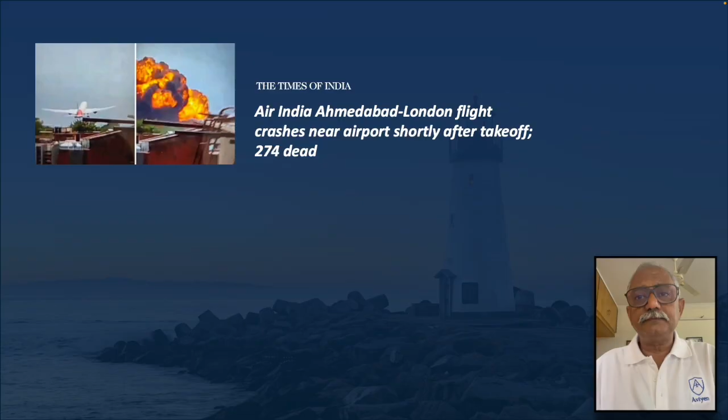Safety management system need for reforms. In the recent past, India has experienced a few tragic air accidents. Everyone's asking, what went wrong? Was it a mechanical failure, human error, or something else? But this video isn't about speculation. Until the black boxes are decoded, no one can say for sure what happened. What is clear, though, is that we have a system that's meant to prevent tragedies like this, and that system has some serious cracks.

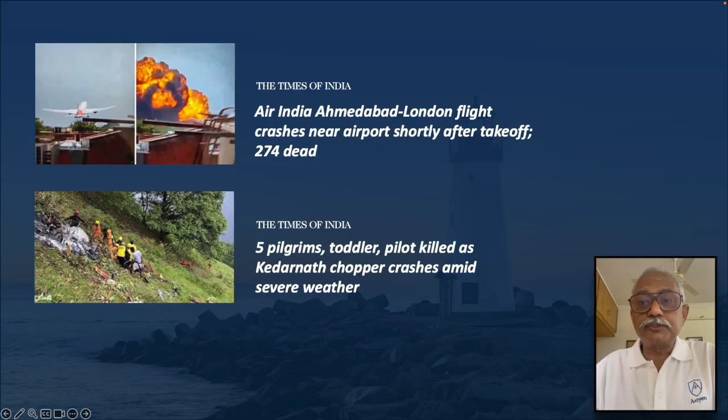This video is intended to raise awareness among stakeholders about the current state of safety management in Indian aviation. Don't be surprised, majority of the safety management systems across the globe are no different. As a disclaimer, this video isn't about blaming anyone, including Air India or Boeing. It's about learning from the systemic gaps and pushing for stronger aviation safety management in India.

Let's start by breaking down a few key terms from the world of aviation safety. There's a big difference between a hazard, an incident, and an accident. Similarly, risk assessment and root cause analysis are two very different things. A hazard is a potential risk, something that could happen. On the other hand, an incident or accident is something that's already happened.

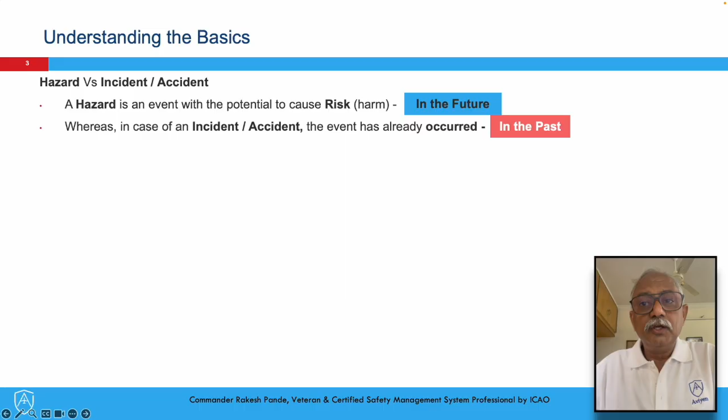So what do we do with them? For hazards, we carry out risk assessments to evaluate potential threats and put preventive controls in place. For incidents and accidents, we are supposed to do root cause analysis to figure out why something happened and how to stop it from happening again.

Risk assessment is more subjective. It's based on expectations, assumptions, and can differ from person to person. Root cause analysis, on the other hand, tends to be factual and objective because the event already occurred and past data exists to make informed judgments.

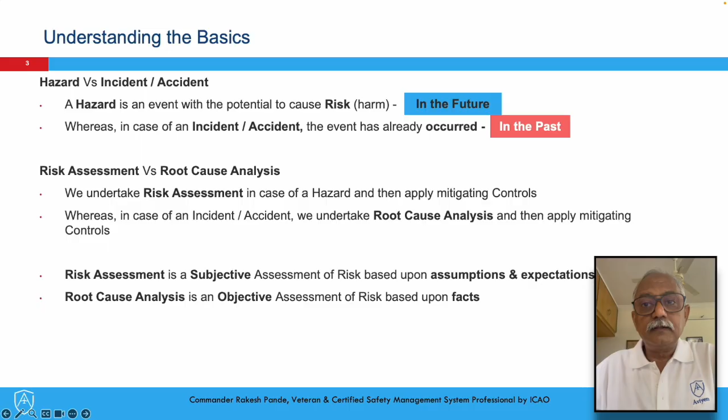Now let's talk about where things go wrong, starting with DGCA policy. The DGCA's 29 September 2020 policy requires aviation organizations to maintain something called a hazard register. But the way this hazard register is defined is quite messy. It borrows from three different sources: ICAO, the Defense Standard, and the European Union Aviation Safety Agency, and lumps hazards, incidents, and accidents all into one list.

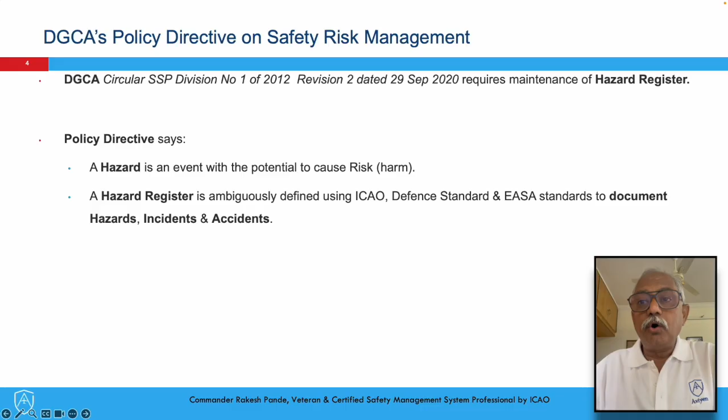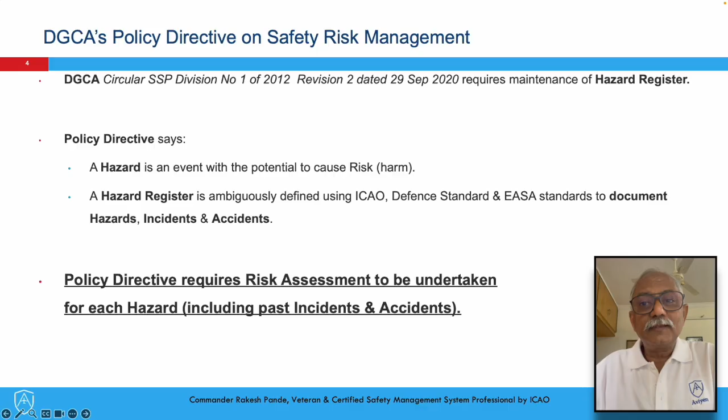So far, so good. But here's the kicker. The DGCA requires a risk assessment for each item in that list, even the ones that have already happened, like incidents and accidents, for which root cause analysis should rightly be done. And that's where the core flaw lies. The system logs incidents and accidents, but doesn't require any root cause analysis.

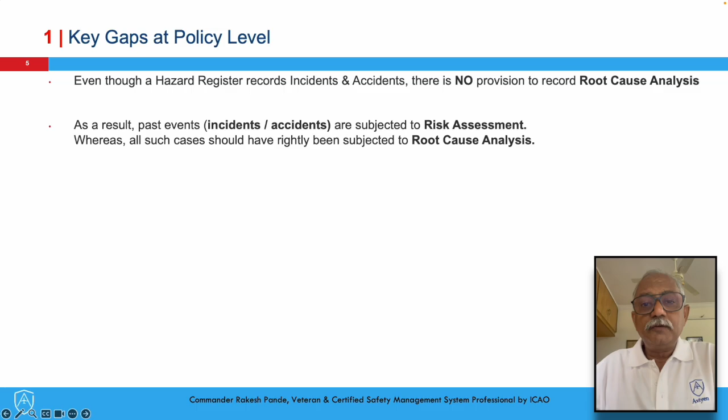Instead, even past events are subjected to subjective risk assessments. We are using guesswork to fix things that already happened, when we should be using actual data to get to the bottom of it. Because of this, real underlying causes remain unresolved, and the same mistakes are likely to repeat. Even DGCA's own records of past incidents and accidents hardly identify and document specific root causes or any long-term mitigating measures.

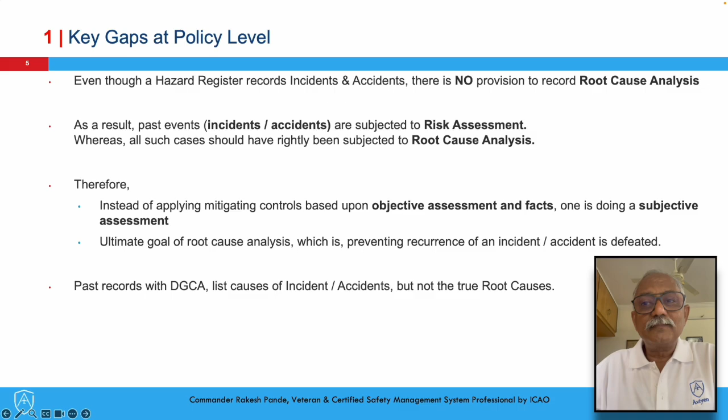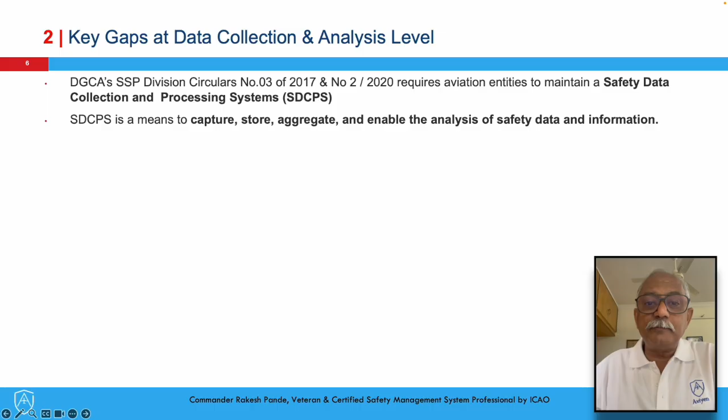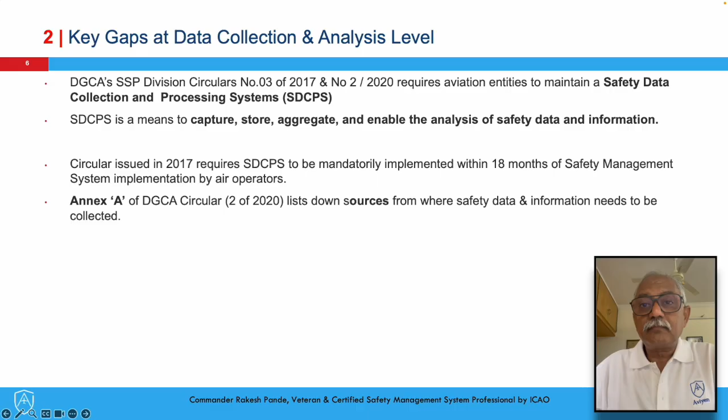Now let's look at another piece of the puzzle: DGCA's safety data collection and processing system. This system is supposed to collect and analyze data from airlines and service providers, and it's supposed to be run by trained professionals. But here's the strange part. The concept was initially envisaged in 2017, and it was made a mandatory requirement for all air operators to implement as part of their safety management system within 18 months. Today we are in the year 2025.

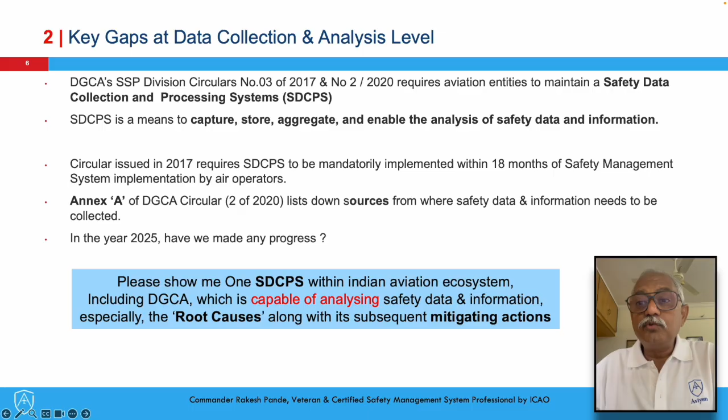Show me one safety data processing system within Indian aviation, including that with DGCA, if any it has, which is capable of analyzing safety data and information, especially the root causes along with its subsequent mitigating actions. If not, then we are dealing with a fundamental blind spot, a serious underestimation of how critical root cause analysis really is. And unfortunately, the mindset has consequences.

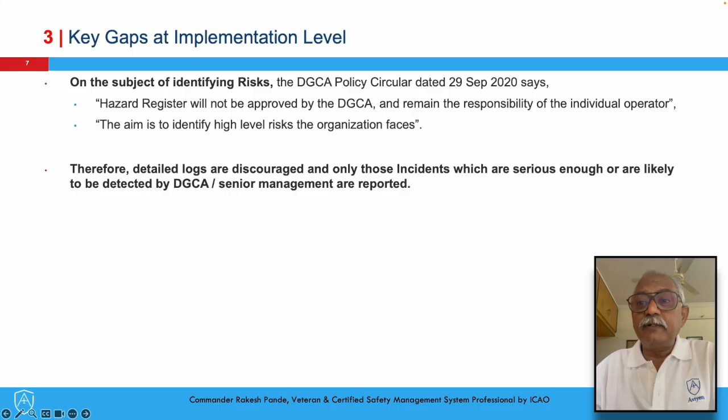First, organizations are often discouraged from maintaining detailed hazard registers. Second, even minor incidents frequently go unreported. This masks the impact of small-looking incidents becoming the root cause of a major air disaster. Additionally, there's a belief, whether spoken or unspoken, that reporting a hazard or an incident will make someone look bad.

Instead of encouraging transparency, the system punishes it. And that kills the most important part of any just safety culture: the idea that people can report mistakes without fear of retribution. The result? Incidents go unreported, lessons aren't learned, and risks pile up quietly.

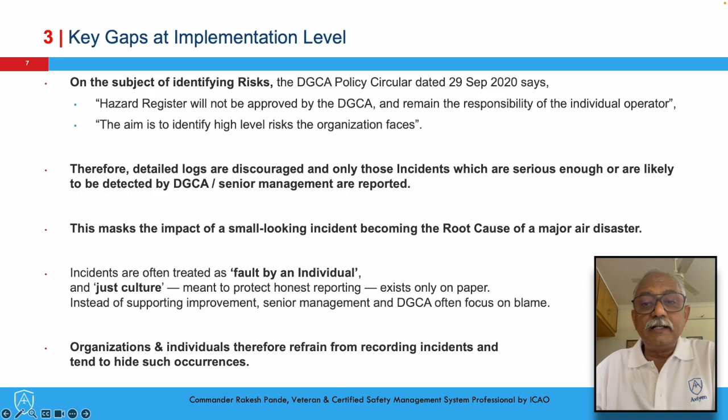Now, some might say this video is being too critical of the DGCA, but let's look at the big picture. Who are the main stakeholders in Indian aviation? Airlines, airports, maintenance and repair organizations, service providers, passengers, and of course, the Government of India, represented by DGCA. Out of all these, the DGCA is the only body with regulatory authority over others, especially when it comes to safety. So if they hold the power, they also carry the responsibility. And when that responsibility isn't met, they must be held accountable.

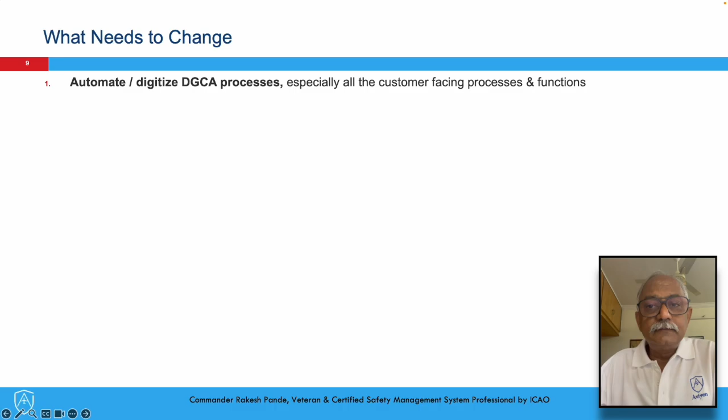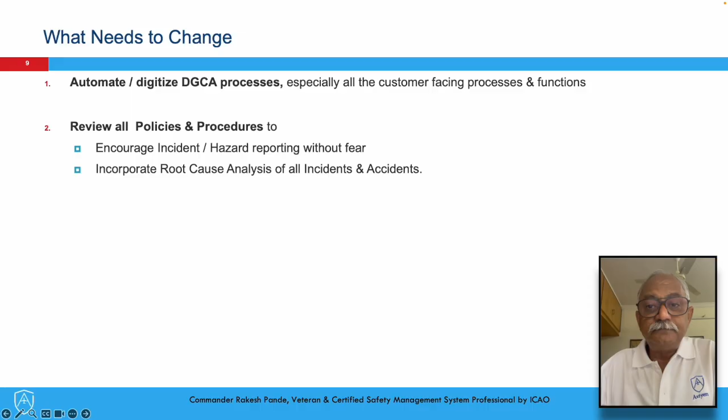So here are the three things I believe must happen immediately. First, automate and digitize all DGCA customer-facing processes for transparency, consistency, and efficiency. Second, review and update all DGCA safety policies to include mandatory root cause analysis and actively encourage hazard and incident reporting without fear. Third, properly adopt and implement a safety data collection and processing system across all stakeholder organizations, with a central database at the DGCA level. Let's not wait for the next tragedy to fix what we already know is broken.